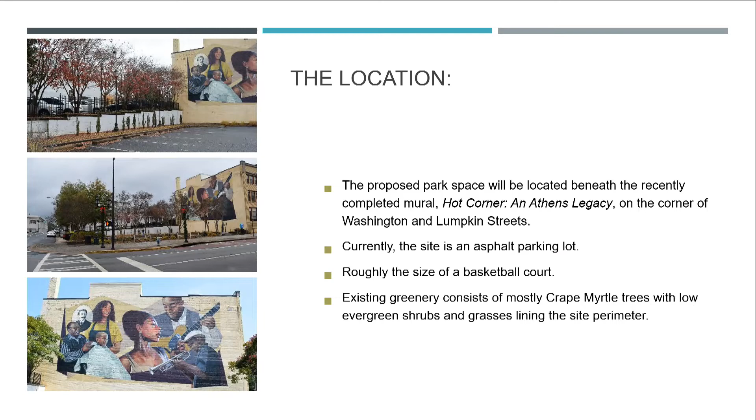You all know the project site. It is currently the site of the new mural, Hot Corner: An Athens Legacy. It is a surface parking lot, approximately 0.18 acres, which is the rough dimensions of a basketball court, just slightly bigger than that. So it's not a very large park. As you well know, this site was designated for study to become a park because of the new mural, which might have initiated it, but also because of its centralized location, which makes it an awfully good opportunity to create a downtown-located green space for our community.

So the Downtown Development Authority engaged us to push forward the conceptual plans that had been presented onto the table, to flesh them out, so to speak, and see how they would be implemented. In our conversations, we got approval to really put the design through our typical firm design process to make sure that there were not any ideas left on the table, and also to open up the design process to a public engagement phase in order to collect information from the community so that their aspirations and expectations are also reflected in the plan. Our firm was founded in 1984 by Dale Jaeger. We are an environmental design firm that specializes in cultural and environmental design and stewardship.

So a little bit about the design process. We think of ourselves as a research-based design firm, and so we ran this site through how we typically approach a project like this, starting with the environmental history and then also looking at the social and cultural history of the site. I'm not going to go into great depth on all of the images I show, but there are a few interesting things about the environmental history.

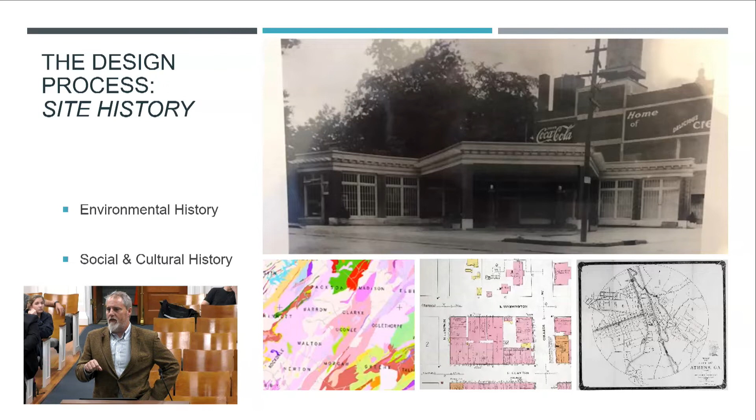Cultural history, the slide in the middle is an old Sanborn map from the late 1800s. It's top left of that image, and it was the location of a stable and servants' quarters back in the early 1800s and into the early 1900s. By about 1926, we hadn't nailed down the exact date, it becomes a filling station.

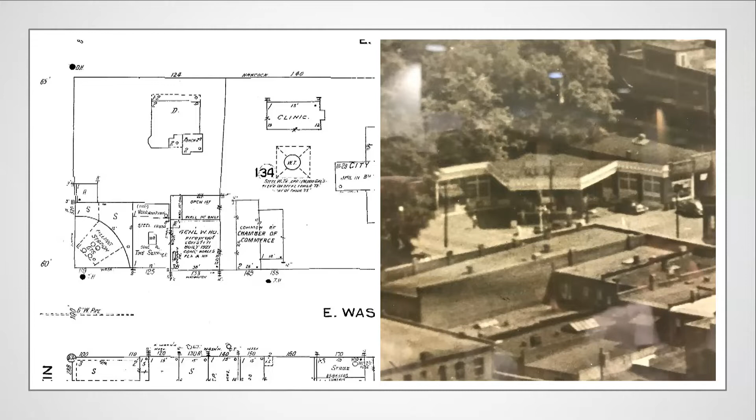Stables and servants for what? The house faced Hancock, and this area of town was residential, with big houses. This was a full lot that stretched from Hancock all the way down to Washington. The house was up on the corner, almost where the water department is now, and the dependencies stretched out south with the stable facing Washington Street.

Do we know whose house it was? We do, I don't know the name of the person off the top of my head, but they were actually running that down in the office. We focused more on the ownership of this lot because it's pretty fascinating, but early on it becomes a gas station.

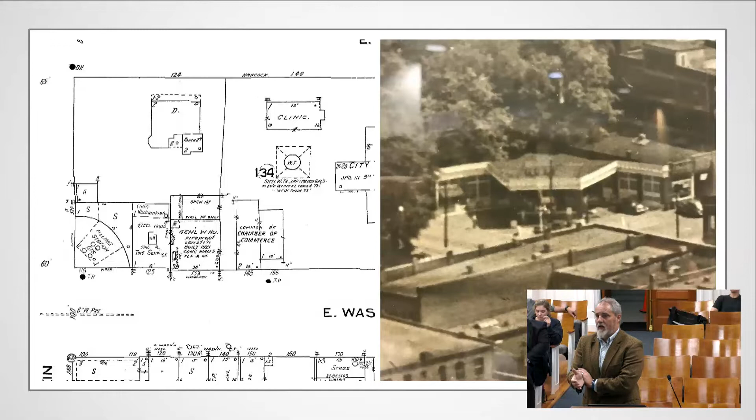The Gulf downtown filling station is what it was through most of its history, beginning in the mid-20s up into about 1970. And it wasn't just a single building — this is a Sanborn on the left-hand side, and this is an oblique aerial looking at it.

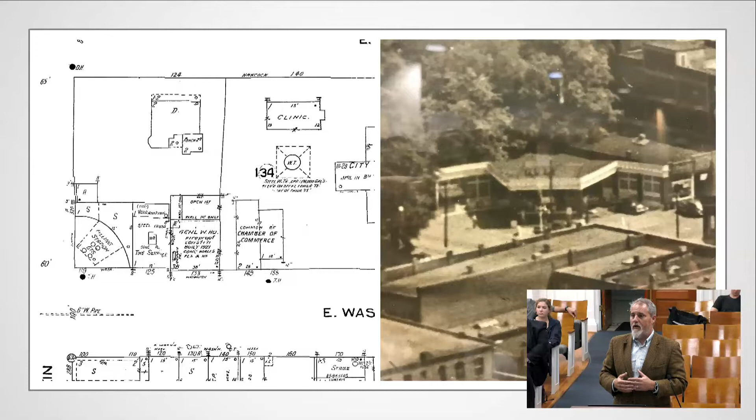It was multiple buildings. A filling station occupied the corner of the property, and between the filling station and the Costa building there was a series of automotive repair shops. There was a tire service building in 1926, which you can see here. It became a parts and supply store, then an auto repair shop, and it was pretty consistently used for those types of services for most of the century.

The result of that is when we started looking at this, we were wondering what's taking place under the ground. Because this was decommissioned in 1970, before the EPD's underground storage tank program had begun, there are no records of this lot in EPD. So we couldn't go back and say storage tanks were removed, etc. We engaged an environmental firm to do ground penetrating radar on the site and made sweeps back and forth looking for any subterranean evidence that might inform our decision-making and design.

We did identify 3 anomalies on the site. The large anomaly in the center of the site is more than likely a debris zone where maybe there was a repair trench or depressed pit that got filled in during demolition. Again, that's speculation.

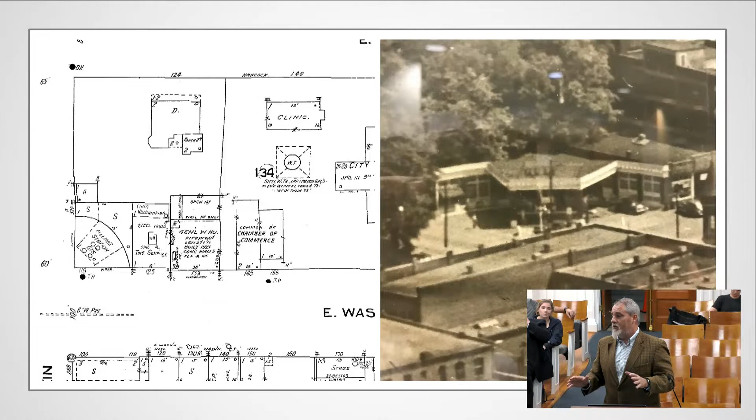The 2 sites on the west side of the lot near the exit onto Lumpkin Street show all of the characteristics of underground storage tanks. They're small, about 3 feet wide, about 8 feet long, so they're probably old school gas tanks. In fact, if you look back at the Sanborn map, they actually label the location of the gas tank storage systems that are in the approximate location of where we found these anomalies.

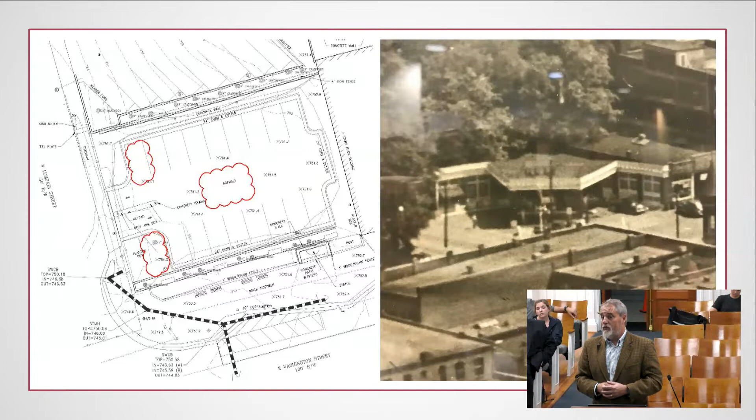So there are probably tanks there, probably small, old school tanks. We think that's an interesting possibility, but we need to make everyone aware of it in order to take the next step of either trying to identify the soil conditions around those tanks, or be prepared during construction of the park to remove the tanks and remediate any soil.

One of the programs we would like to suggest for this park is handling all of the storm water on site, healing the site the best we can, being the best stewards of the environment of this site as we possibly can. In order to do that, we're going to need to make sure we have good soils. And thinking forward, if we're going to have children playing here, we want it to be as healthy in a most holistic way as we possibly can.

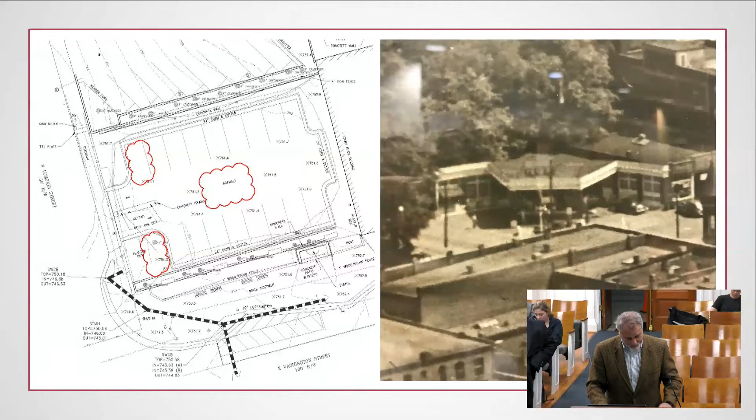I don't know why I brought notes. I'm not even looking at them.

So then the next thing we did was engage the public, and we had 3 outreach efforts. One, we had an in-person open house at the planning department, which was a visual preference survey where people could come and place dots on different features that potentially could make their way into the park — different types of seating, different types of arbor structures, different types of activities from yoga to splash pads to band stages, etc.

We collected that information and prepared a report for DDA. Then we did an online survey where we got about 900 responses, which we thought was pretty good. I'll go through some of that information. I'm happy to provide you with all of the data output from the online surveys. I'll hit some of the highlights here in a second.

And then we went to the Mayor's Youth Council, did a similar visual survey where they were able to interact on their telephones and vote for different aspects of the park.

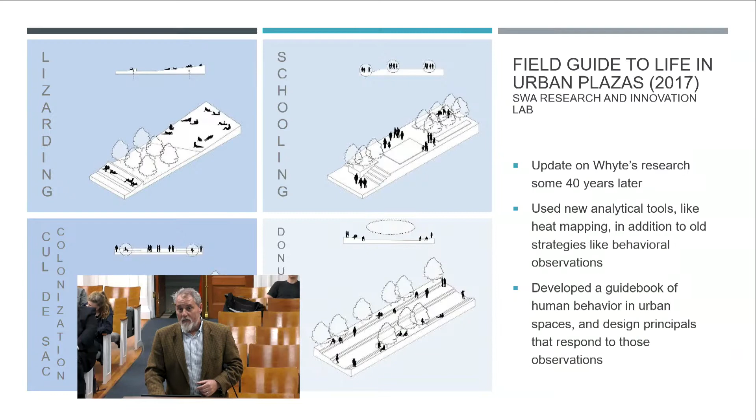A research firm called SWA actually revisited Holly's concepts because there's been a lot of talk in our profession about the changes that have taken place over the last 40, 50 years, in particular the prevalence of technology amongst our young people, and how that influences how people from different age groups interact with public spaces. A lot of Whyte's theses and conclusions still hold true today, but this research outfit, SWA, kind of updated Holly's work.

So we actually reviewed that in order to make sure that information was reflected in the conceptual designs as we moved forward. For example, where Holly Whyte would have said that people occupy the outside of a space before the inside, SWA translates that into the concept called the donut effect. Lizarding, on the top left, is pretty self-explanatory: people, in particular younger people, are drawn to soft surfaces in order to recline in the sun.

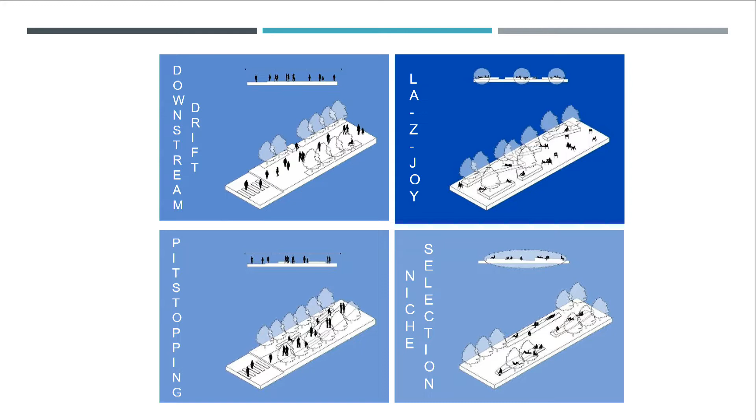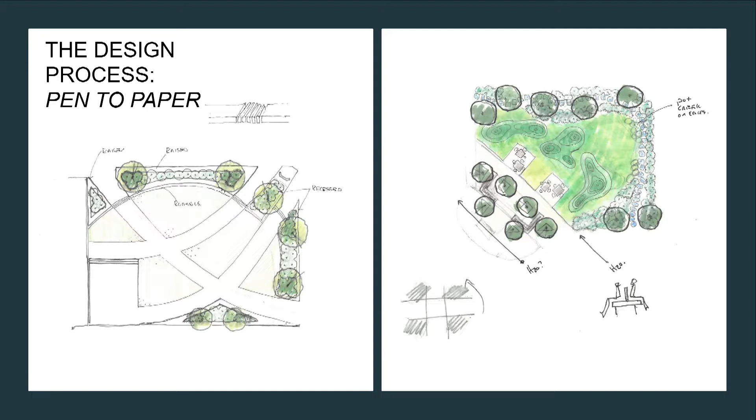So once we developed our principles for this space, we began cranking out different concepts. We had multiple people in the studio working independently, knowing the objectives based on the public engagement process - here are the elements of a successful social space in an urban environment, so go at it. We presented to the DDA a total of 6 concepts and sat down around a table, ran through it with them, and these were not intended to be either-ors. We were consciously trying to show multiple strategies in each concept to see what appealed to them and what they thought would lead to a successful space.

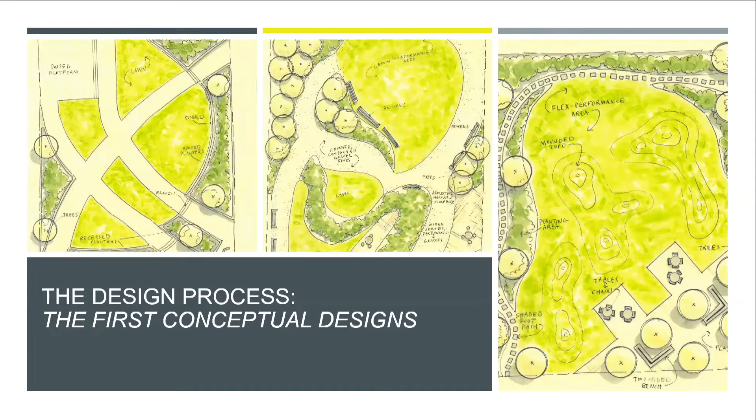And out of those 6, they said we like a little bit of this one, we like this corner and that one, we really like the entrance here. So we took that back, cut the pieces up, and put it all back together, and those are the 3 refined concepts that we're going to show today.

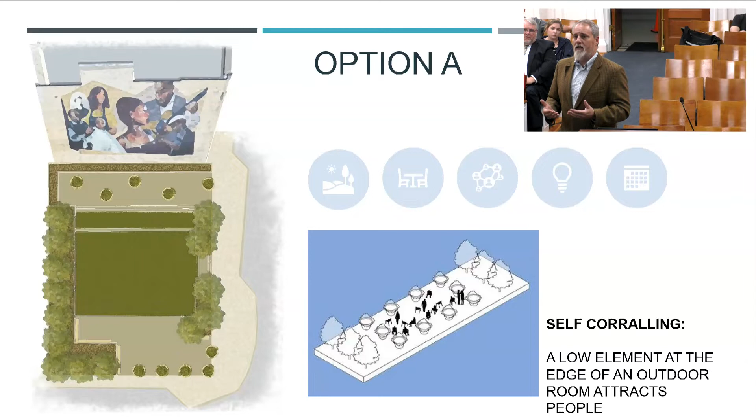Concept A is a departure from the initial concept that you all approved for this project to move forward. It is a combination of a depressed green space with a slightly elevated patio platform on the eastern end adjacent to the Costa building.

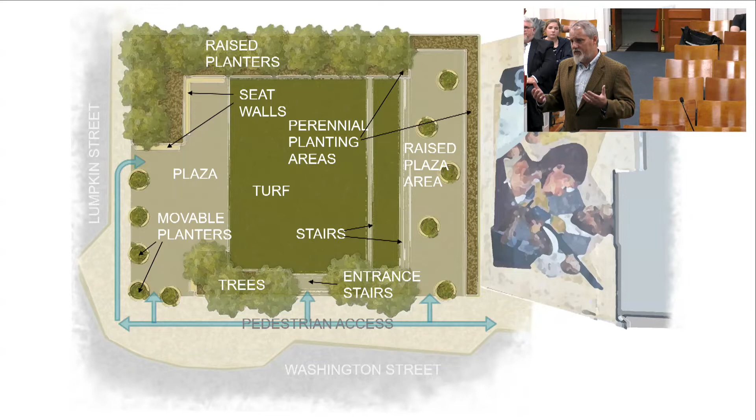That's a raised plaza area that is multifunctional. It can serve as a place to have chairs and tables, and it can also serve as a special event space as necessary. It is accessed through stairs from the lawn panel, but it's on grade with the adjacent sidewalks for accessibility.

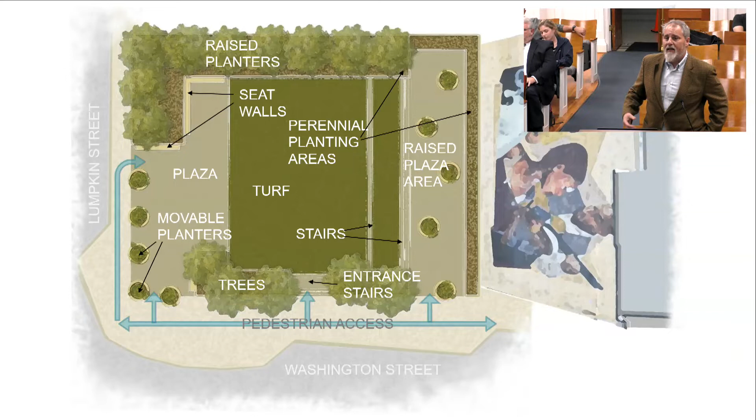We've expanded the plaza space on the corner in order to try to encourage entrance into the site. Again, that's one of those principles of how you actually draw people into a site - activating the corner of an entrance into a public space leads to more occupancy.

A variety of seating in addition to movable chairs perhaps on the plaza area. We've integrated seat walls throughout the site, and the plantings are predominantly trees and shrubs expected to be part of a bioretention area.

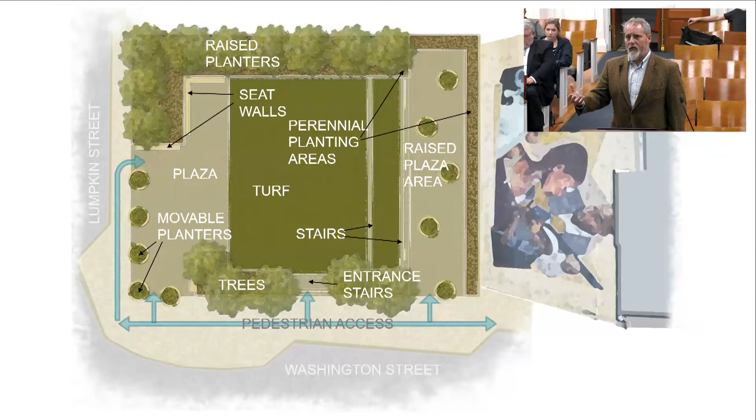In these graphics, the dark green area is typically grass, because we did utilize turf in a lot of spaces since it's soft and allows for flexibility of uses. Pavement areas haven't been completely detailed out, but those are the gray areas. The pedestrian access points are illustrated by these arrows.

So that is concept 1, modeled in SketchUp. Question: would there be issues with flooding with the depressed green space?

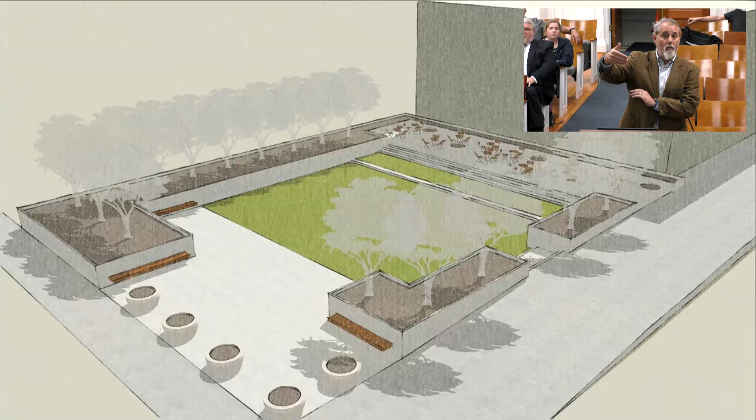No, because it would be graded out towards the patio. There is a slight grade slope in this image, from the right to the left, so surface water in this scheme would come out over this patio area.

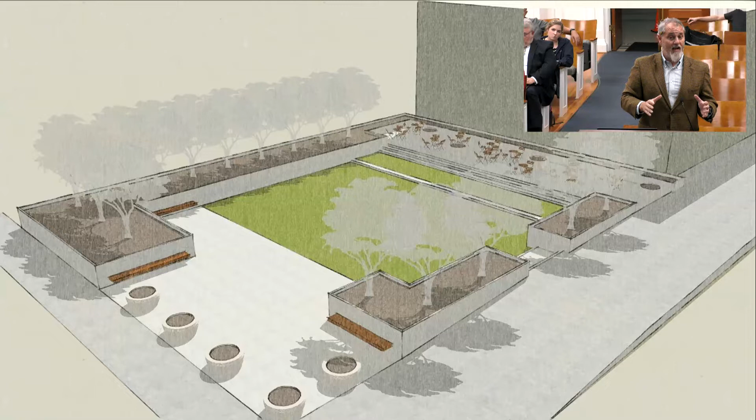What we want to do, and you'll see this more in some of the other concepts, is have runnels that would collect the stormwater and take it into the planting beds. Because of the size of this site and the fact that it is currently asphalt, it would be a disservice of our design to allow any drop of water to leave the site. It's really easy to capture it all here.

Question: I'm concerned with the different elevations in these areas and ADA accessibility. I think that's a really good point.

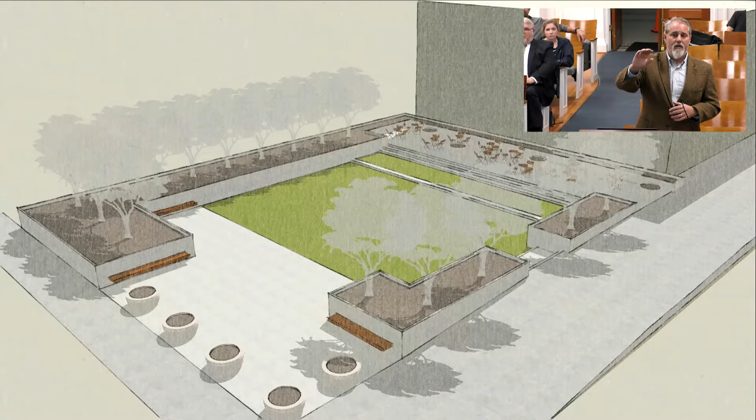In defense of elevated areas, the highest wall that you will see in any of these is less than 3 feet. We feel like that's kind of the threshold for height. The seat walls you see around the trees are closer to 2 feet tall, so somebody can sit down on them.

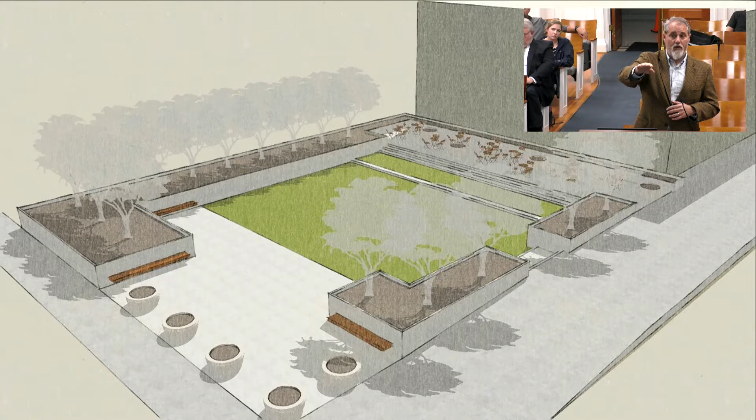All of the areas are accessible, so the upper stage area, which is only probably 2 feet above ground, is accessible from the Washington Street sidewalk. And then the plaza area below is accessible from the corner. So I agree with you that the spaces need to be accessible, and I'll try to show how we've accomplished that. But having a variety of heights in spaces helps activate a space.

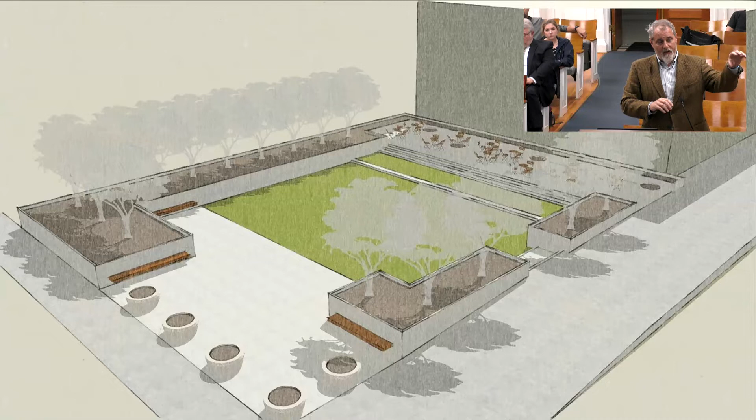For example, one of the principles from both Holly Whyte and SWA's research involves perching, where people like to find slightly elevated spaces - younger people under 35 like to go 3 feet up, and other parts of our community like to go 2 feet up. It's just a slight rise, but they will be drawn to a slightly elevated space. So if we have some vertical complexity in a site, I think you'll see more distribution of activities and more attraction of different people to do different things.

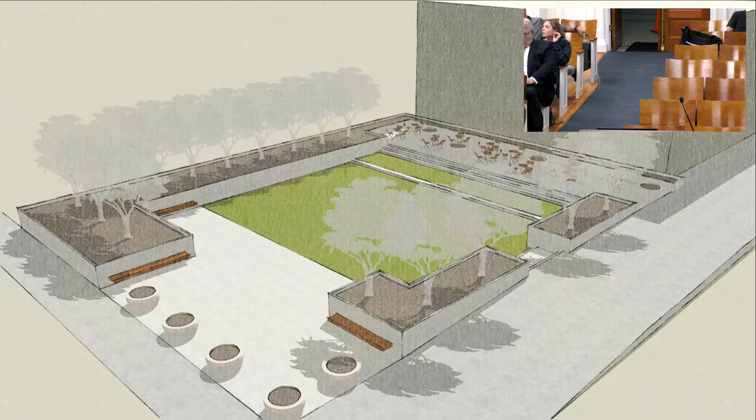That's a good point. I'm assuming the answer to my question is yes, but for all of these options, I'm assuming that if and when the mural needs to be touched up, none of these will impact that. Is that correct? I don't believe so.

I'll be honest, I have not been privy to those discussions. There may have been people in the studio that actually talked about whether we can get scaffolding up against this wall. That's an interesting thing that needs to be considered, so I'll make sure it gets on the list.

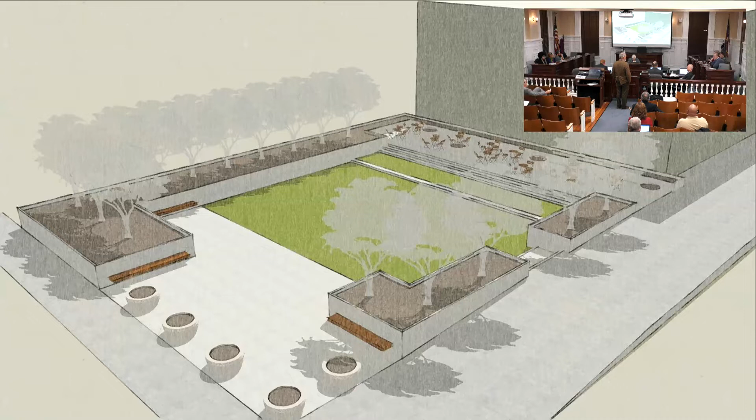And they used a cherry picker before. Obviously for this one, but we do have other designs that have plantings along that edge for a specific reason, though nothing that I think would prohibit repair and maintenance to the mural.

Option B. Option C is going to be a little more formal, so we wanted something a little less formal.

The genesis of this concept was looking at geology maps and plant community maps of this area of the Piedmont, using those forms and the idea of successional and emergent plant communities to inform the design. The idea was an abandoned field, where plant communities push out towards the center, representing a change in growth and community, which we felt this area of downtown tells as well. It attempts to replicate the cultural history of this area of downtown through an environmental design, built upon native prairie plant communities that will occupy the planting spaces.

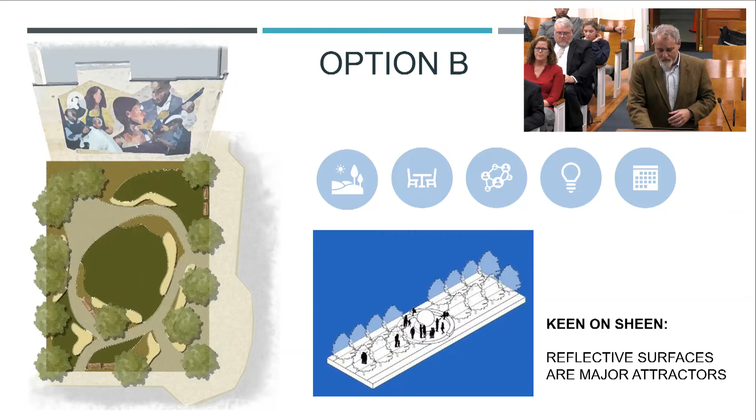What you see in yellow are seat walls that replicate the igneous formations that create the unique geology of this area. Other features include a combination of different seating strategies, including concrete seat walls that can double as a low-tech exploratory play area for children, a significant amount of turf in the center, and a very active edge around that center area.

Also, one of the SWA concepts is keen on people being drawn, especially younger people, to mirrored surfaces. You see that with the Chrome Bean in Chicago—it draws people because they like to take pictures of themselves, and it's even better when a reflective surface lets a person take a picture with something interesting in the background.

So we felt like the mural here offers an opportunity for people to put themselves in the mural, helping to serve a changing audience that's been shown to be attracted to this type of design strategy. All of these concepts have flexible performance spaces, nothing programmed only for performance—in this instance, not a raised platform but an open area that can become the location of a portable stage.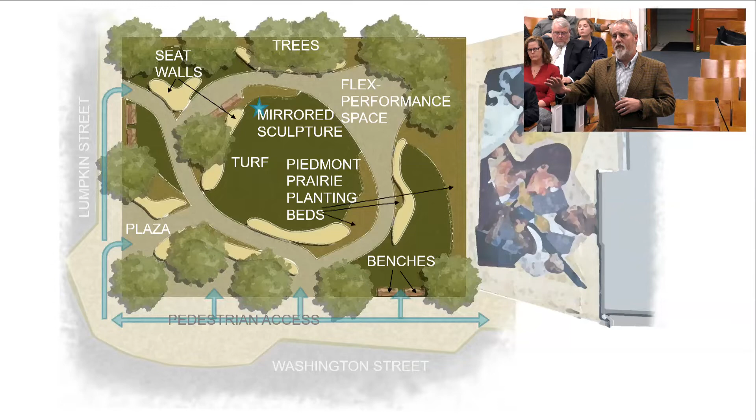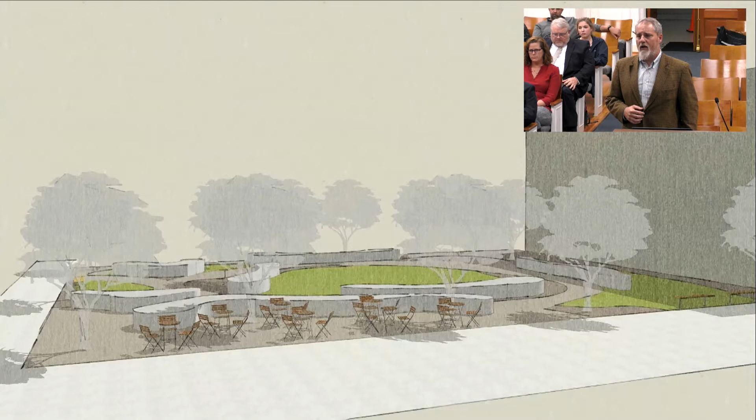So an axon of that looks something like this. The edge is another strategy that's successful for activating urban spaces—really embracing the edge of a plaza. A lot of people like to sit on the edge of an active pedestrian zone, in this instance Washington Street or Lumpkin Street, and be observers. Even those not actively observing are drawn to spaces that look out into pedestrian spaces, which is one reason the edge of this concept is so heavily activated.

The third concept began as a reflection of the four corners of Hot Corner, twisted 45 degrees and then slid into the center to reference the cultural geography of this side of downtown. It then evolved as we applied more design strategies from Holly Whyte and SWA.

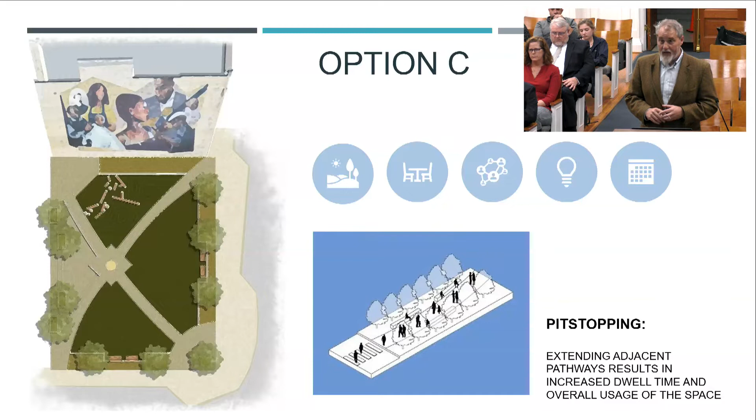The landscaping is predominantly turf with perimeter bioinfiltration borders. This is another example where the grading will shed water to the south and west into specifically planted and structural soil areas, so all of the water gets filtered and cleaned prior to entering the substrate and making its way to the aquifer, or more likely Tanyard Creek.

Other elements of this is the back, what I think of as the back, which would be the north side, has a slightly elevated raised plaza. And what that does is appeal to these design principles that people like to be perched slightly elevated. They also like to be facing the sun in those locations. For families and parents, this provides them with an observation area to be able to watch their children.

The southern and western edges are planted with benches in order to create a sense of safety and security for families. And then we have provided a stage area that's slightly raised, probably 3 steps up. There you can see the ramp, so it is accessible from all directions. It's an elevated ramp, which creates the need for a slight wall that can double as a seat wall.

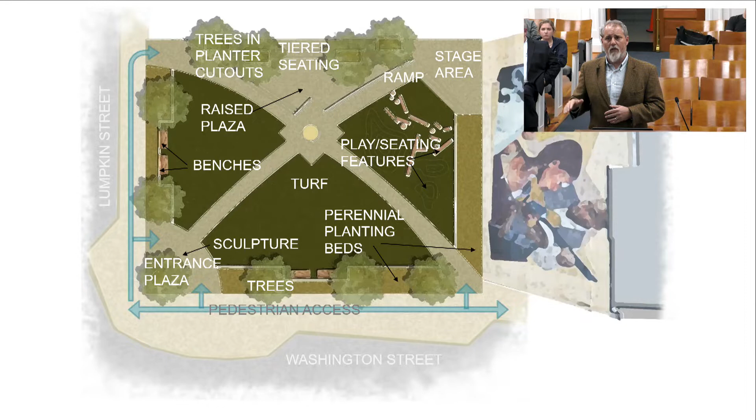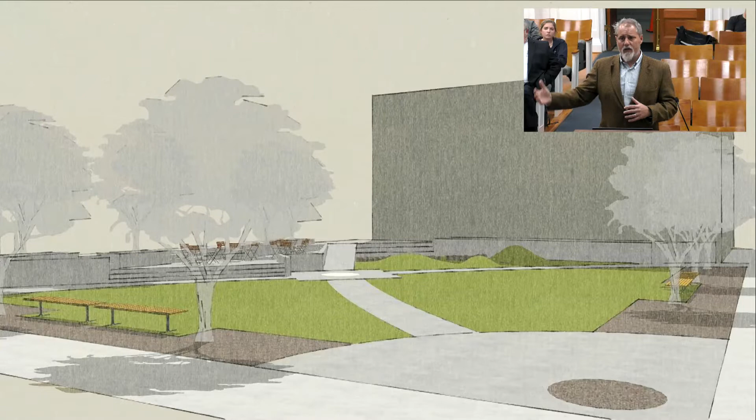And then in front of that stage area, we've placed, and you can see it probably better here, a series of mounds in order to just create a little topographic interest in the ground plane. They're not very big, but they provide younger children a place to explore and roll around.

We also have placed, for lack of a better word, stacked logs and stumps in order to create an exploratory play area for children that also doubles as seating for a small stage event, a performance event. A larger performance event obviously would spill out towards the rest of the space, but because of the elevated stage, we feel visibility would be no problem.

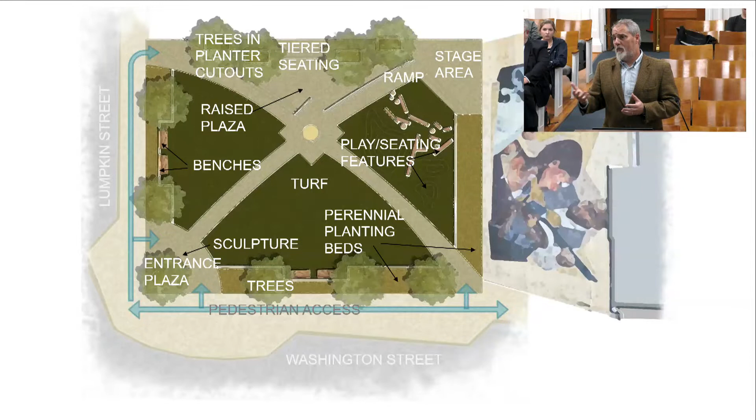Here's one where we have perennial planting beds. We'll have to look at that. My guess, just looking at this, is probably about 5 feet deep, so shouldn't be an obstacle to maintenance. But again, I think that's something to think about in future iterations of this design.

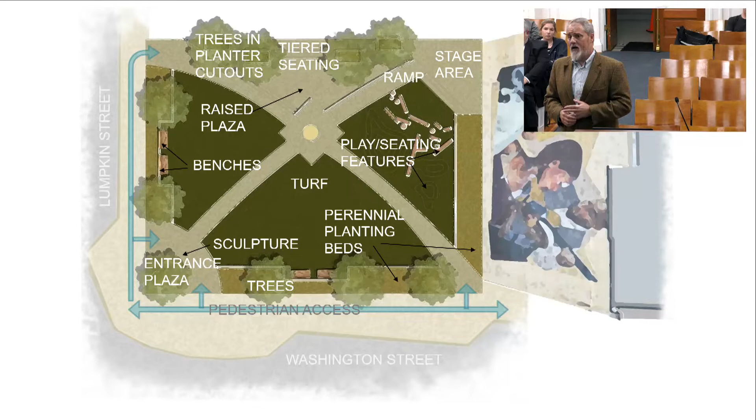And where we are headed is based upon feedback and conversations that we have with you today. I think I've got it so that all 3 of them are up. What we would like to do, in coordination with David and Linda, is push one of these general concepts, which hopefully reflects the direction that you feel like this space needs to go, and push it to a 50% construction package so that we detail out every square inch of this place. We know what all the materials are. We know what all the furniture options are.

Something that I did not mention, and I don't know if y'all want to talk about this, but the sculpture that's being proposed for this site. A Harold Rittenberry sculpture has been donated for this site, and it's being housed by the folks that donated it. They would love to see it on this site. So, for example, in all of these concepts, we have integrated places where we think a sculpture would be appropriate and not detract from the mural. For example, in option C, that medallion on the ground, which would serve as the entry point into this space, is designated as a good spot for a piece of sculpture.

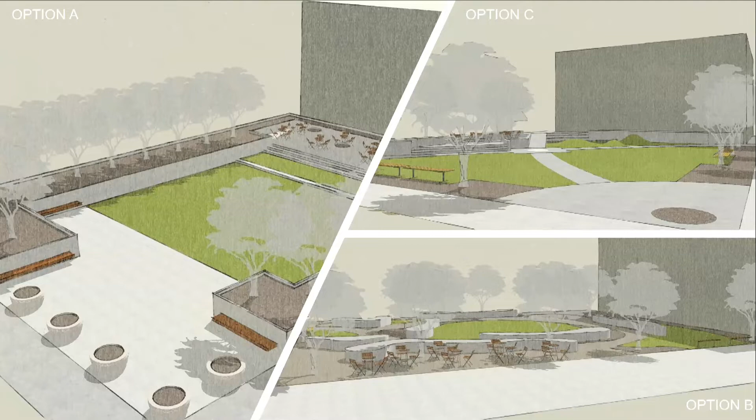Well, just my own personal preference, I kind of like option B because with those little walls, there's lots of places for people to sit. And I think that's what people like to do, especially if it's a nice sunny day, is go get a sandwich or something and just kind of sit there and hang out. The others are fine, but personally I think those little walls are neat for people to be able to sit down.

One of the questions I do have, though, is the tables and chairs. You said that people like to sit in a chair and then kind of move it an inch or so just to get comfortable, which suggests to me that obviously they're not going to be bolted to the ground, which also suggests to me that there's a potential for them to grow legs and walk. So how are you going to address that?

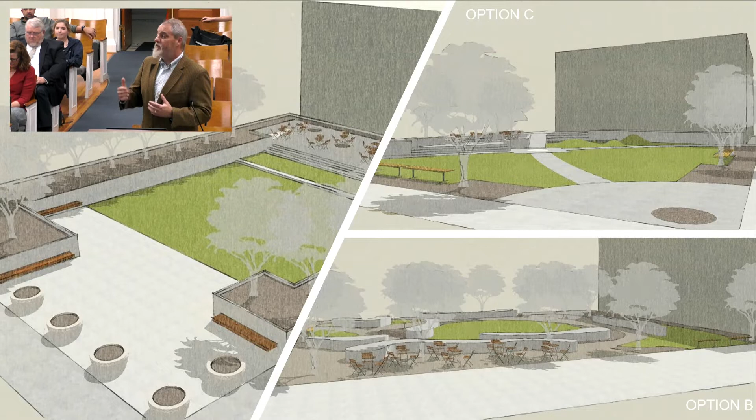Well, I think we design a space where we want to raise the expectations of how people are going to treat this space. That'd be one thing. I would love to see us at least experiment with the option of having unfixed, movable furniture, because it's proven to be much more successful and leads to more occupancy and user satisfaction. I don't think, in none of these options—in fact, we've talked about it, and we knew this question was going to come up.

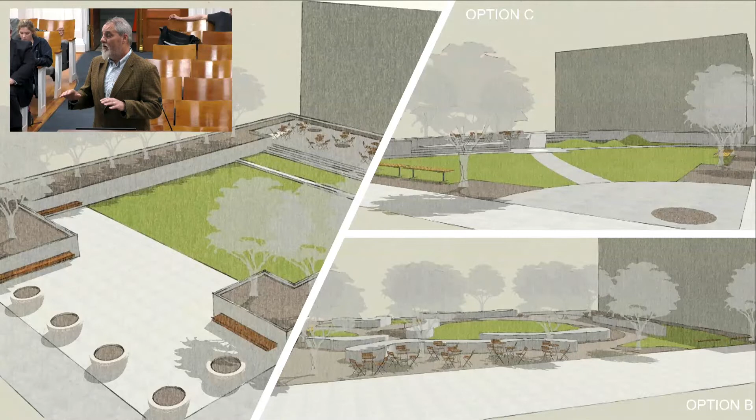And all of these, the ground plane surfaces where the majority of the seating is designated, is a hard surface, either a paver, a porous concrete, or a traditional concrete. So we could retrofit fixed furniture if that becomes a problem.

Jerry, you had a question?

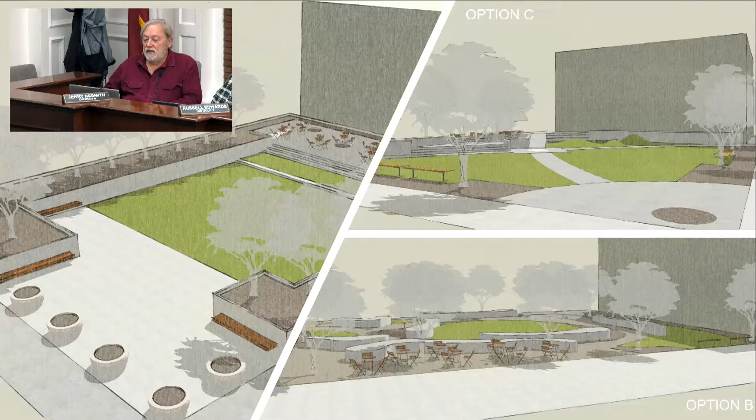Yes, I also prefer option B, but just stepping back a little bit, I think you've designed some possibly good rooms, but we're in the context of this location, and I think we're ignoring it. This is Hot Corner, and the Costa building next to it is going to have a future too. I think these three things, the location, the mural, the park, and the Costa building, should be considered in context with one another. We have an opportunity to build something that has pull and gravity to it.

For me, I would just love us to take the context of being at Hot Corner and honor it. Maybe our sculpture should be something about Black history or Black people in this community. Maybe the Costa Building should be a Black History Museum. And now we've got something that really has a theme to it. I know that's stepping back a little bit, but I just think we have an opportunity here we may never have again anywhere in the city.

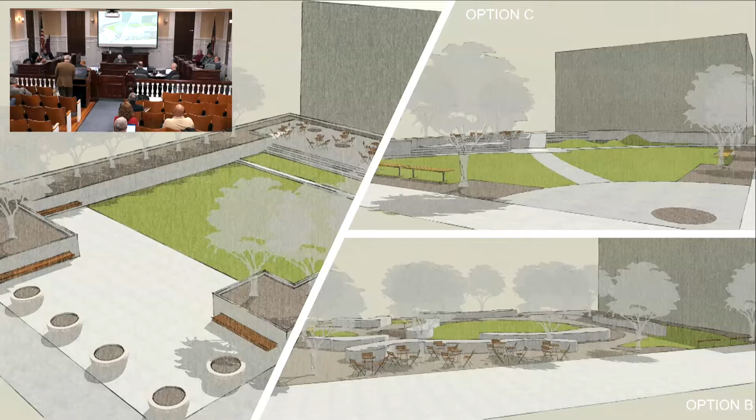If I could piggyback off of that really quick, speaking of sculptures and amenities in this space that speak to the cultural legacy of the area, there's been some interest expressed by community members that we bring the EJI lynching marker to this space, as a way of honoring the folks who've lost their lives to terrorism previously in our community. So as you think about whichever of these designs ultimately advances, we probably want to think about a couple of sculptural sites. I know about the scale of the Harold Rittenberry piece, and I would anticipate you could probably fit a couple things on the site given its scale.

Sure, I mean these are all things that we've considered, and I think they're all good suggestions. Yep, Melissa? Yeah, I also like option B the best.

I do have some concerns. Those walls, it's kind of hard to tell from the rendering if they're at actual seating level or if they're more meant to encourage climbing up a few feet. I also feel like they divide the space up a little bit too much, so maybe if they were more perforated, or if those were smaller islands, that would allow for more ability to traverse through the space from any direction.

I like the shade. A big concern for me in this space is the need for shade. This is like April through October, mid-afternoon, it's getting beat down by that afternoon sun.

Yeah, I totally agree with you. And we went through different designs that provided shade in multiple ways, because I live here too, so I agree with you. One of the challenges is not overplanting it so much that it obscures views of the mural, which really needs to be the highlight. I think this does a good job of that. It maintains lots of shady areas, but also keeps it open enough with a good view of the mural.

I'll just throw in my pile-on to option B. I think there's sort of a magnetism to that option — it invites you into the space, particularly given the seating there. And I like that you bleed from the sidewalk into the space, especially since we're going to have to make decisions about use of not just the Costa building but also the former bus ticket kiosk — whether there should be a food and beverage component there — you'd have an immediately adjacent space to take advantage of a sandwich or beverage from one of those establishments. And like Tim noted, if you just had a slight elevation to sort of a circular area in that northeast corner, that would formalize the performance possibilities there.

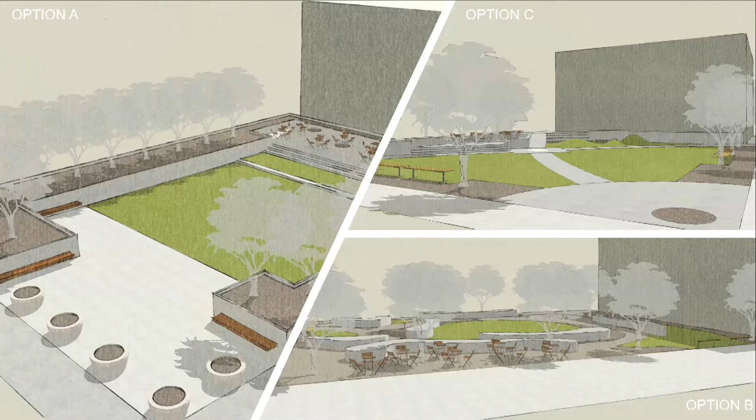Yes, and just to jump onto what Commissioner Edwards brought up, I also definitely liked the creative seating, especially the hills. I've been at other parks and green spaces that had that element — it makes it an interesting place for kids to play, but it also does that 'lizarding,' as you called it. People just like to prop up there in the grass and read a book. So if we could have that element pulled into option B somewhere, I think that would be really neat.

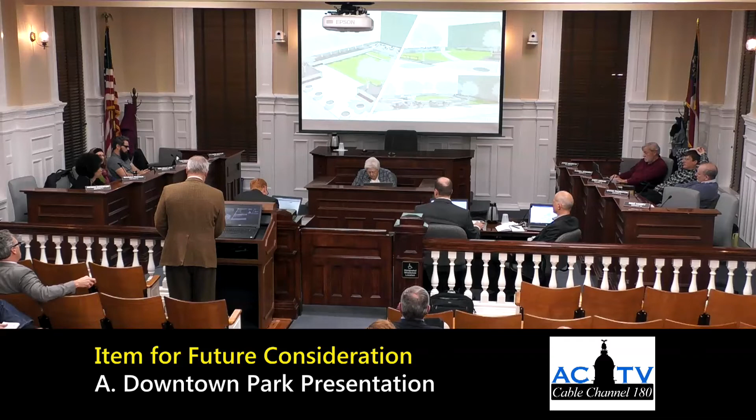And Commissioner Link brought up that there's definitely in option B some possible green space, maybe down in the bottom right corner, where there could be an interactive sculpture or something included there, where the benches are kind of facing inward, right below the mural. Because that mural is pretty high up — I think it's a good 10 or 12 feet — so you could get a decent climbable sculpture there without impacting the view of the mural at all.

One of the things that emerged in conversation when this wall was selected as the site for the mural was discussing with the artist the idea of pushing the image as high on that wall as possible, to allow almost a story of other interaction below — knowing that something was going to be there, though not knowing it'd be a park. That means at least a body wouldn't be blocking a significant element of the mural.

Feel like you've got a good set of feedback? That was actually awesome. Yeah, it was good, thank you. Anything else? All right, thanks a ton, really appreciate the work. Looking forward to doing some lizarding out here.

All right, from one park to another — a long-time park in the evolution is Dudley Park. That's also going to have some new features associated with it, particularly given the emergence of the Firefly Trail, not too difficult to get to from the parcel we were just talking about. So Keith Sanders, our SPLOST program administrator, is going to take us through some new Dudley options.

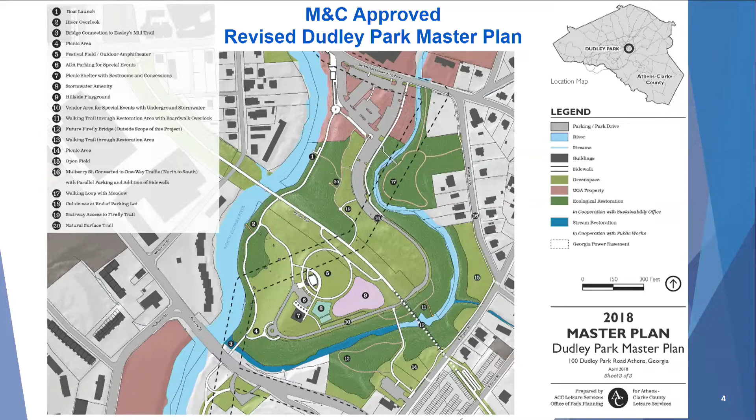Just to back up slightly, one of the steps was that in 2018 you all approved the revision to the master plan, shown in this document. I know you can't read all of those elements, but we'll go through those that apply. Shortly after that approval, Mayor and Commission approved a prioritization of the project concept elements that we received from the public input process, shown in that white chart on the right. The must-have elements that are not grayed out are the ones we're talking about in the schematic design.

We believe those are the ones we can afford based on the budget, and even with that, we're still asking for a slight increase in the budget. The others will have to come through other SPLOST programs or other funding as it becomes available down the line, based on the priorities we have. The numbers that correspond to these correspond to the key legend on the master plan, not necessarily a prioritization number.

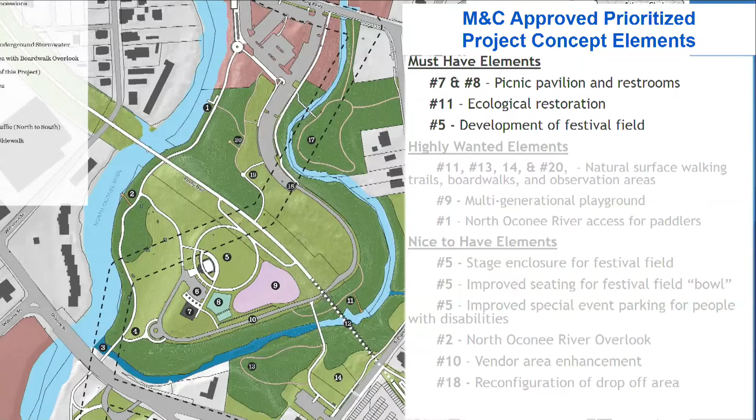The area we're really talking about doing most of the improvements is to the south of the Firefly Trail. Just to orient you slightly, each of the slides have a couple of color-coded points that show up the same. We have a Georgia Power easement that cuts through the park, the existing Firefly Trail that goes through the park and comes to an end where the new bridge currently under design will start, and an existing piece of public art that was put here as part of the Firefly Trail when it was built.

When the Firefly Trail was put in, we also installed a concrete pathway that accesses down to the park, creating half of this circle that we'll talk about further. The park already had a granite retaining wall that circled a drive that's been there for decades, dating to when the dance center and other improvements were there. The dance center used to be in this park; of course, it's now over at East Athens Park. There are also some existing retaining walls from that building that would be removed, and a parking lot that would be removed.

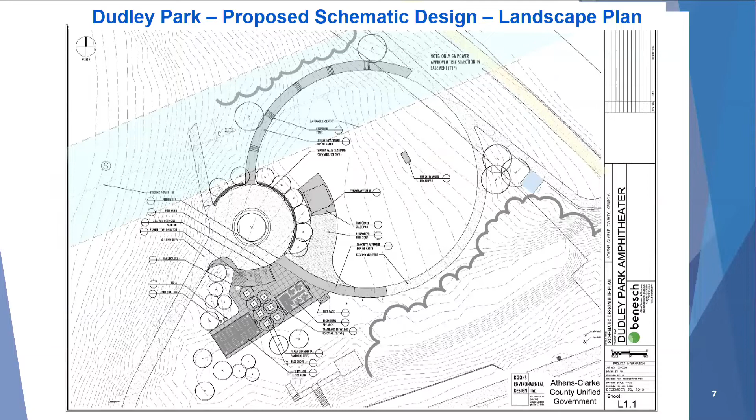So the proposed schematic design, overlaid on the existing documents, still shows the Georgia Power easement in blue, the existing Firefly Trail, and the existing piece of art. Schematic design has a couple of different elements to it. Predominantly, the main improvements would be the addition of a restroom space, a paved plaza space, and a picnic pavilion that could be used for 50 to 60 folks at tables.

We also put back a couple of parking spaces for handicap parking, in case there are events or something going on in the pavilion. Parking and drive access to this is through a typically locked gate, staff access only, so it's not as if the general public would be driving up and using these spaces. But if you had a birthday party, an event, or a rentable event going on here and needed some ADA spaces close by, staff could open the gate and allow those to be used.

Also, we have a paved section in the middle of this circle area, ultimately looking for a festival field, amphitheater-type space. Long-term, perhaps putting some sort of structure there, but that's not in the budget at this point. What we are looking for here is a paved surface to be able to move the new showmobile into. We also have some probably grass-paved areas to move the stage across, but still have grass within the circle, and the circle would be repaved.

We'd probably have to do some grading and tear up a portion of that so trucks could pull in and back the stage into that circle. We're also looking at completing the circle with a concrete sidewalk and some steps.

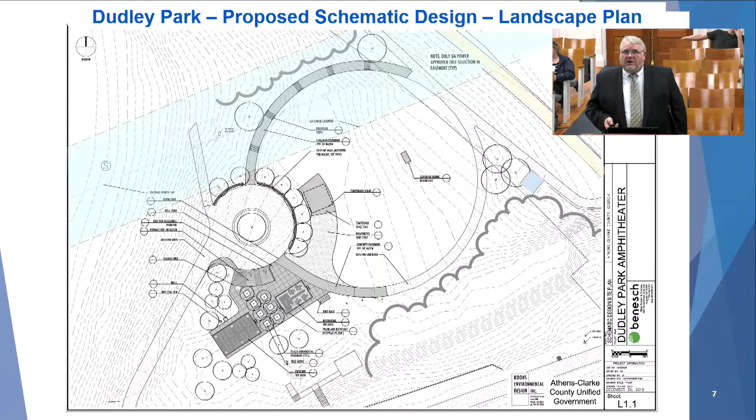As we move on in the schematic, we do have to do a little bit of stormwater work. We'll have to do some collection, and because this is a low area in the circle, if we're going to be backing the showmobile across it, we need to be able to drain it. We'd spread that on site. We don't believe treatment is going to be required, since we've got plenty of distance before the river to spread that and allow sheet flow across the ground.

We'd have bike racks. We'll get to the restrooms and pavilion. The restroom is a 4-stall design, individual restrooms, gender neutral, with some storage space. It's an economical design, but we think we can certainly jazz it up and make it look nice.

It would have a granite water table at the bottom, roughly 30 inches to 3 feet, probably cement board and batten siding, metal roof, metal trim, trying to make it as low maintenance as possible to keep operating costs down. LED lighting, water fountains with bottle fillers, and a pet fountain.

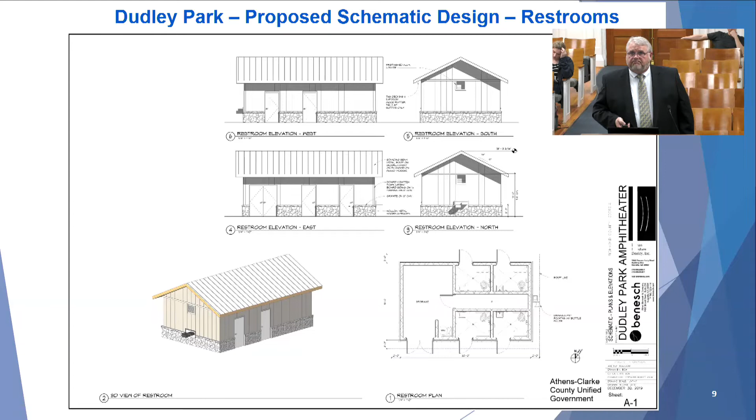The picnic pavilion can probably fit 8 tables in the 6 to 8 foot range with ADA seating at them. Again, metal roof, similar construction, granite on the bottom of the columns, and most likely wood timber construction.

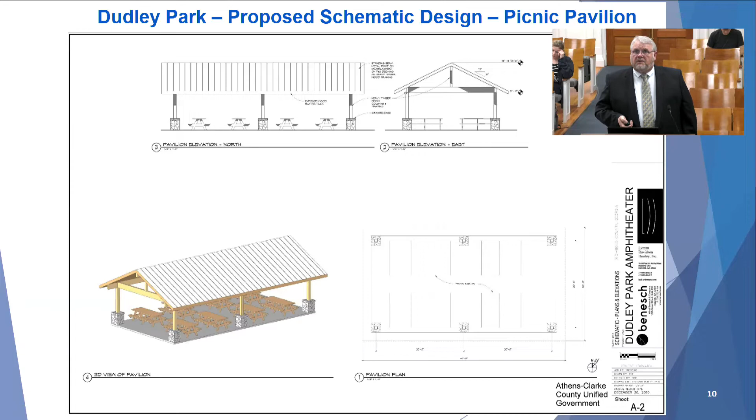Here are some overall images of what we're looking at. Again, we're looking at this grassed plaza area for play activities—not really a formal space with equipment, but a field where folks can come and have a good time. It does have some slope to it. We're looking to limit the amount of grading as much as possible while keeping that slope, so it focuses down toward where the mobile stage would be moved.

We're trying to limit how much we disturb within the site as much as possible to keep costs down, but still get the impact with the improvements we're trying to achieve.

On budget: the 2011 budget originally passed was $970,000. We've spent or encumbered some on design, dedicated money for public art, and set aside a little contingency, which leaves about $650,000 for construction. Our estimate at this point is $890,000 for the improvements we've shown you, so we'd be asking in the agenda report for $240,000 to be moved from the jail project into this project.

So the next steps in February would be asking for approval of this schematic design, a budget amendment to move the $240,000, and also to advance the project to construction using our on-call contractor and in-house staff, so that we could get it completed by early fall of 2020.

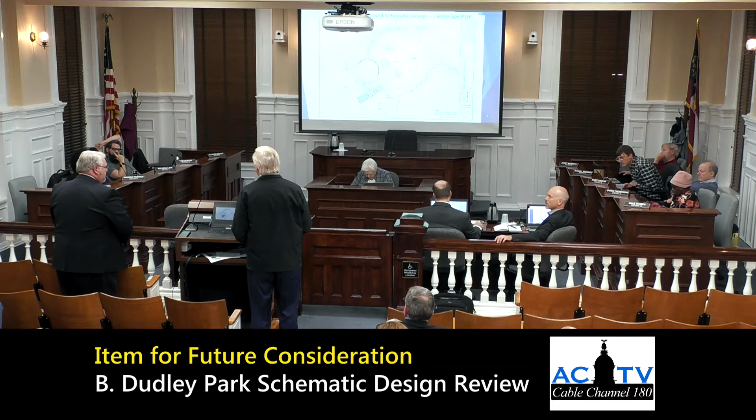If you don't mind me addressing part of the discussion we've had with both citizens and with staff, if you take a direct line from this park, there's actually 3 outdoor basketball court opportunities that are not that far away, between the East Athens Community Center, Lay Park, and over at Reese and Pope Park. They get used, but it's not like they're so saturated that we're looking for additional within that same proximity.

So we've been trying, and with the tight space that we have here, you have to separate basketball courts from something like a picnic shelter because of the noise, and oftentimes the competitive spirits that go on during an outdoor basketball game, especially when it gets to be teens and adults. You need to separate that from something like a shelter if a group's trying to have an outing there. So we're a little bit restricted in the site that we have designated there.

I don't really know if I believe that. I know that at Lay Park there's a picnic shelter a stone's throw from the basketball facility. And that's not, Lay Park is not walkable for kids living over by Trail Creek. That's not reasonable for like an 8-year-old, 12-year-old kid to do. So I'm gonna keep pushing on that.

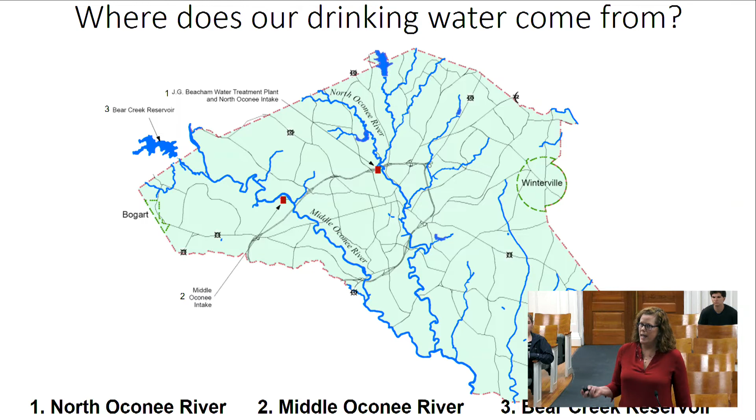Where does our water come from? It comes from the Middle Oconee and North Oconee rivers and the Bear Creek Reservoir. It's important to remember that we are 50 miles from the headwaters of these rivers, which means we have a very small basin that our drinking water comes from, making us especially vulnerable to drought.

This is by Ben Burton Park. On the left is the Middle Oconee River at normal flows. On the right was during the big drought of 2007. This is at our drinking water intake, just a little bit upstream.

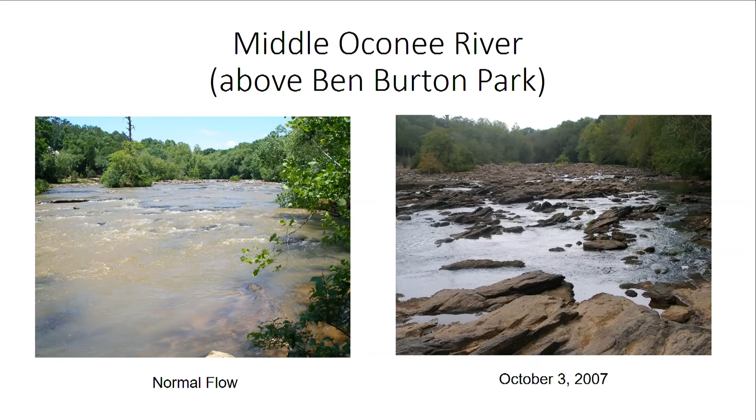And just looking at those images, I had to do a double take when I was watching the presentation, just to see, is that the same vantage point? You can actually see the same significant trees in the upper left in the background. It was dramatic at the time.

And that was briefly drought and where our water comes from. We do a 20-year capital improvements plan, and we update it on a 5-year cycle. We call it our Public Utilities Department Service Delivery Plan.

It is based on our population projections and our economic development trends and goals in some ways. From those, we develop our water and wastewater demands, which serve as the foundation of our service delivery planning. The plan is a 20-year plan, but we look out beyond that, which I'll show you in a minute.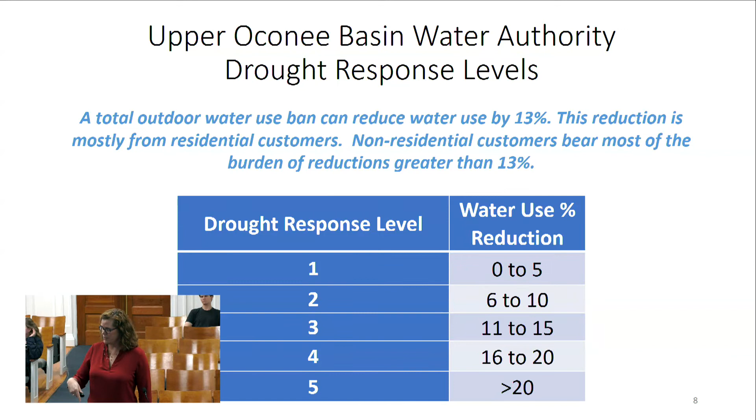And that brings us to another issue, and that's drought. The Bear Creek Reservoir is controlled by the Upper Oconee Basin Water Authority, and that authority and the Environmental Protection Division can actually impose water use restrictions on us, the county. The drought response levels you see up there are the Upper Oconee Basin Water Authority's response levels.

It's important to know that back in 2008, when we did that all outdoor water use ban, I think most of you will remember that, we could expect our water use to go down by about 25%. But now, since Athens is much more conservation minded, people are very efficient and have changed how they use water outside. When we say an all outdoor water use ban now, we can expect a reduction of about 13%.

About half of our water is used by residential customers, and that reduction from outdoor water use impacts residential customers for the most part. That means if we have to go into a drought response level 3 or 4, or God forbid 5, our non-residential customers will bear the brunt of that. As a result, there are going to be some severe economic impacts, and that was what we studied when we did the risk assessment.

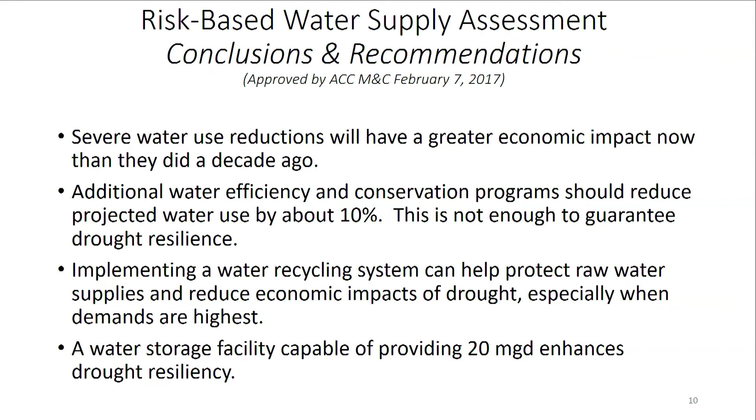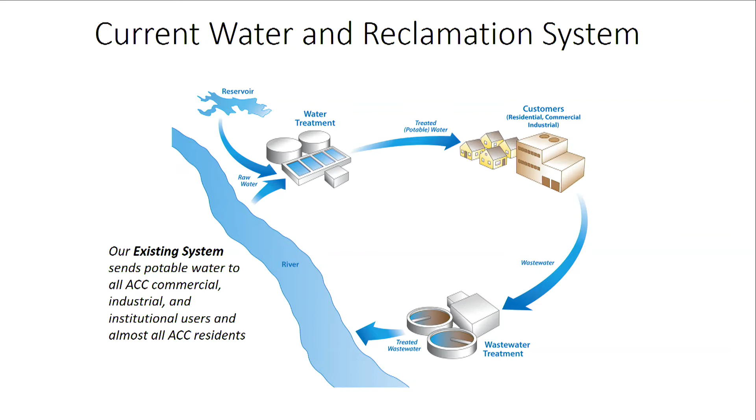To explain the water recycling program, I want to step back and talk about our existing system. It's intuitive to me, but not everybody thinks about water all the time. So we get our water from the rivers, we treat it at the Beecham plant to drinking water standards, and we send it to our residential and non-residential customers. They use it, it goes down the drain, and comes back to one of 3 water reclamation facilities. We treat about 11 or 12 million gallons a day.

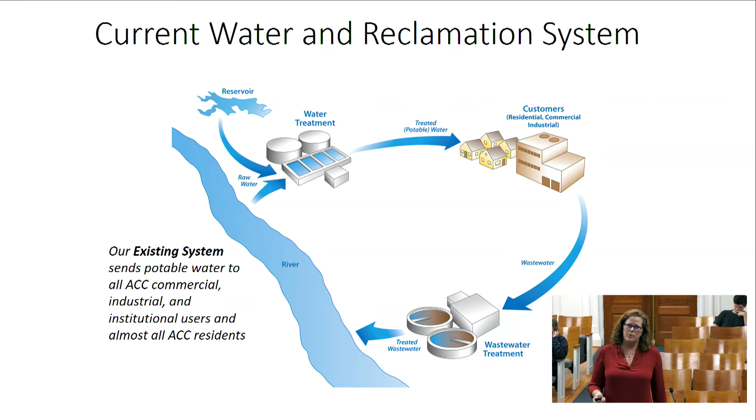We treat that water, we reclaim it, and we send it back to the river. The North Oconee plant, just off College Station, treats over 6 million gallons of water a day, and we reclaim 6 million gallons of water from that facility. So if you think about water recycling, it's the exact same thing, but we take some of that reclaimed water and pump it back up to our industrial customers where they can use it for their industrial processes or for cooling. So we recycle that water. If we have an industrial user who uses 1 million gallons a day of our drinking water for their processes and cooling, and we send them recycled water instead, it reduces our drinking water demand by that 1 million gallons.

There's potential for economic development and to help with this drought issue, because the restrictions on using that recycled water are not going to be the same as for raw water. So if we need to reduce our water use by 20%, that's raw water and drinking water. That's not recycled water.

So what came out of this is the Water Recycling System Master Plan. You probably noticed that I'm starting to say recycling more as a word than reuse. And that is because this isn't a new thing all over the country, and people like customers and our residents will understand water recycling more than water reuse. So we're switching to water recycling as the term.

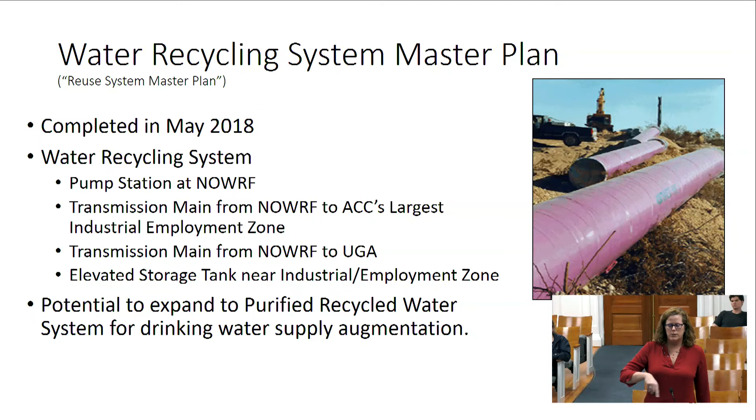The Recycling System Master Plan, I'll go through it really briefly. Essentially what we do is pump reclaimed water, add a little chlorine, and pump it to the employment area in the northeast part of the county for the industrial facilities that are there. And then we pump it in the other direction also to the University of Georgia, and I'll explain that in a minute. There's also potential to use this recycled water and purify it to drinking water standards, introducing it before the Beecham Water Treatment Plant so we can actually use it to augment our drinking water supplies.

I'm going to start out by showing this. The northeast part of the county here is the Athena Industrial Park and the Athens Technology Park. The star in the middle there is the North Oconee plant. The reason we have chosen those industrial areas is because they're really close to the North Oconee plant. So there's a huge opportunity to provide existing drinking water customers with recycled water, and then also perhaps attract additional industries because of the additional recycled water.

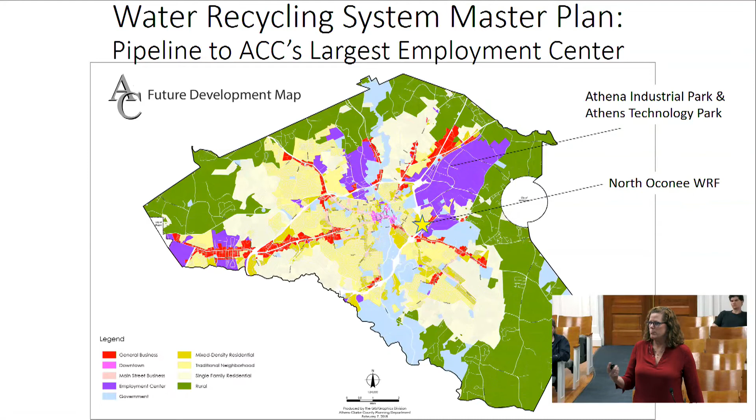Right now, as far as implementation progress, the filters and phosphorus treatment and the recycled water pump station at the North Oconee plant, the preliminary plans were approved last year, and they should go out to bid within the next month or two. That'll be the pump station for the recycled water program.

Last year, you saw the Firefly Trail presentation by TSPLOST. It was a wonderful collaboration where we worked together to get the purple pipe, which is the recycled water main, underneath the Firefly Trail on Winterville Road from Lexington Road to Indian Hills Road. That will be going out to bid this spring.

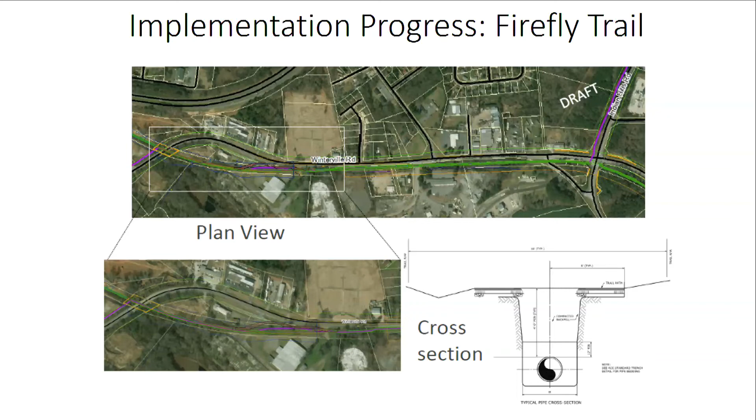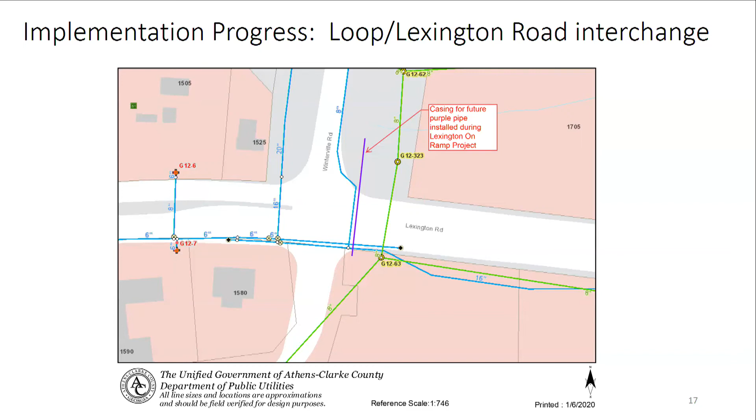Also, as you know, the Loop and Lexington Road intersection has a GDOT project coming up in the next year or two. Our utility relocate program will include adding purple pipe through that intersection, so when we're ready to send water to the industrial park, we don't have to go back and re-dig it up.

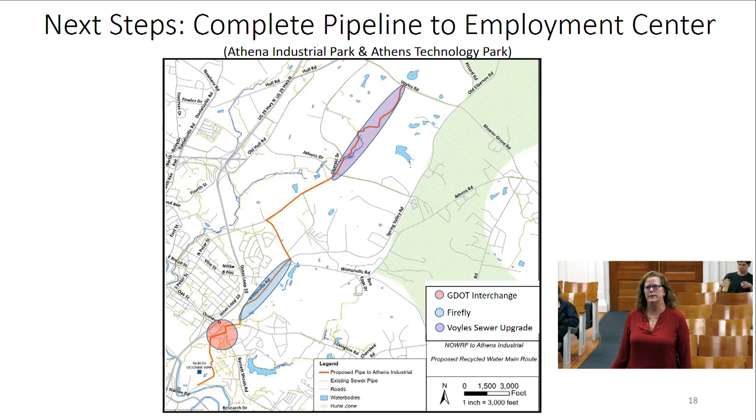The other direction we're sending the water is towards the University of Georgia, and it's really fortuitous for our program that UGA has started with their district energy plants, because the timing is really good. They will be our first big customer, and that will help improve the return on investment of this water recycling program, because we'll have a customer right off the bat. A lot of recycle programs don't have that opportunity.

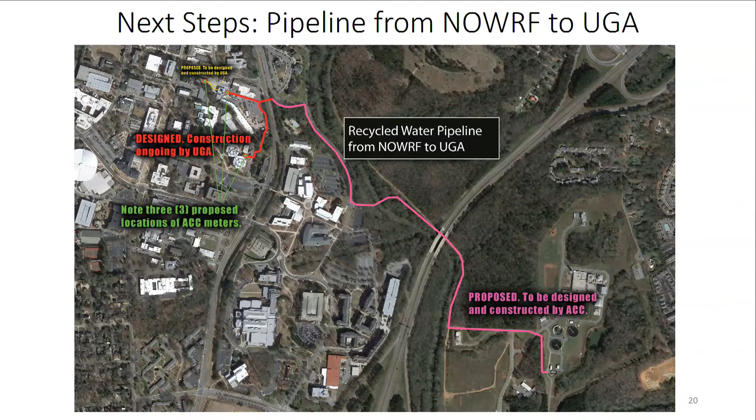The next step for the pipeline to UGA is the preliminary design, which will be underway in the next couple of months. It entails a pipeline from the North Oconee plant, following that line up to the new STEM building at the University of Georgia. They have purple pipe in their design for that building, and I don't know if they've got it in the ground yet, but it will be within the next quarter, maybe this summer.

Before you leave this map, last voting meeting we discussed the fact that UGA was not going to finance purple pipe in one of our projects. Can someone show me where that purple pipe is relative to this one? See, it's up here - this is University of Georgia's phase one of using the recycled water. The other DET plant is up closer to downtown at Hull. So the idea is they need a line, and they'll be putting a recycled line at some point between here and there.

Just a question of how much commitment they're making - they're not willing to move forward with that project. I think there are two different parcels relatively close to one another, sort of off Baxter Street. The one that would receive near-term use, shown in the photograph a moment ago, is just north of Baxter Street, and then the project we were looking at is sort of just south of Baxter Street.

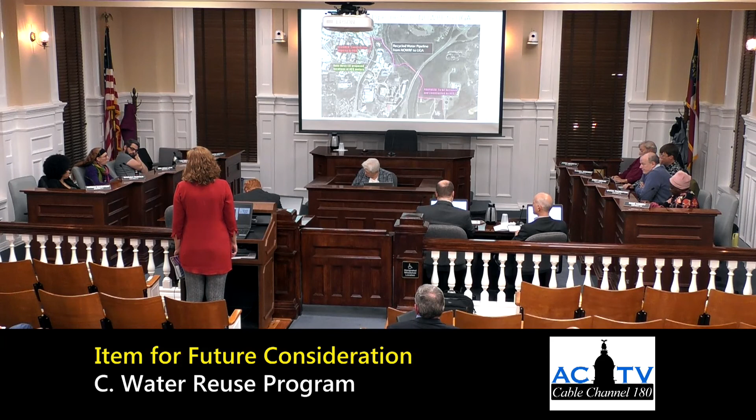I'm curious to know if it's required that water used to process chicken be potable. I kind of wonder if there's no possibility of even hooking that kind of industry up to this system, which is all the more reason to reduce your meat consumption. If you want to make sure that industry uses less water, reduce your meat consumption. I think we can find out about that.

Thank you, so I just had a couple of questions. I know we're not at that point necessarily, but what is the expected difference in rates going to be for the recycled water compared to drinking water they have now? We haven't determined exactly what they'll be, but they'll probably be around half of what our drinking water costs.

Right now, we're just using the reclaimed water from the plant. There's no additional treatment cost other than just adding some chlorine. Okay, so I guess that leads to my second question, which was, what is the cost to ACC pumping the recycled water compared to the drinking water? Is it much cheaper?

The water certainly is cheaper. Yeah, so I guess I'm just wondering, like, the cost of us doing this. And so if we're getting reimbursed for it at half, is that how much of the cost of us actually putting this in place is that covering? Understanding that there's plenty of environmental cost here, and of course for the water sustainability.

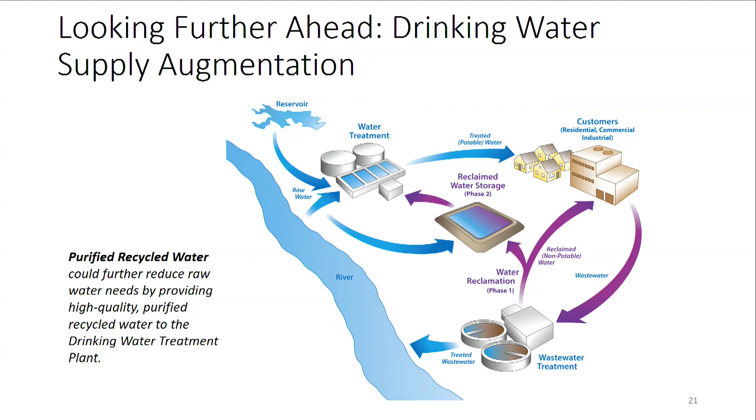To summarize, in the next year there's going to be a lot of activity for the water recycling program. The pump station, filters, and the Firefly pipeline will be going to bid this quarter. The water recycling projects in preliminary design will be the pipeline to UGA and the GDOT interchange. And in just a few months, I'll be presenting to you the service delivery plan, which will have the rest of the recycling water program in it, the non-potable recycling program.

So Marilyn, one big picture question, stemming from some comments Andrew made. Once this is up and running - not the first day of use or the seventh day, but after it's been in use for some period of time - does the reality of recycling some water have any impact on our downstream neighbors in terms of river flows?

Well, it reduces our withdrawals upstream, and it holds some of the water within our own water system, but we haven't done much study on the downstream impacts. I think there are other communities certainly that do water recycling with little impact downstream.

Okay. And I anticipated that, given that holding pattern, that reduction in freshwater intake in the first place. But I guess I just wanted some verification, so I'll probably circle back to that point when we're in the service delivery plan discussion.